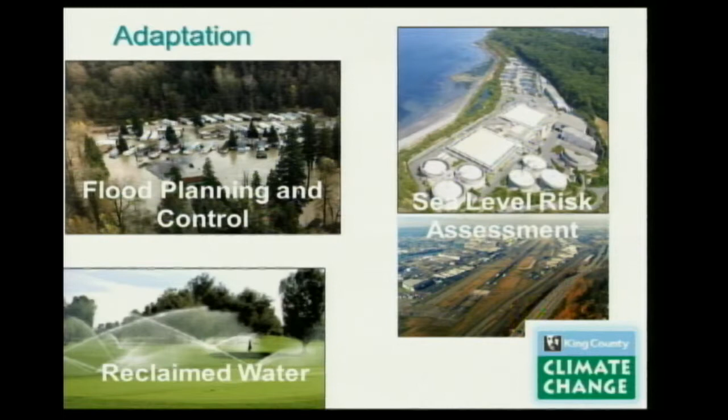So what are we doing for adaptive planning? We haven't changed this slide in a long time, but basically what we were directed to do is plan backwards, figure out when the impacts would happen and what we could do to address those impacts, as we did a lot of our programmatic planning in wastewater, which was undergoing a large 50-year planning event, updating that plan in 2007, and constantly asking the climate question of everything we do and the services we provide.

And I like this quote from Executive Sims back in 2006, because this is a climate science conference. I figured I'd let you see a politician say, go listen to the scientists, not the politicians, unless the politicians give you good policies to follow, and you can use those policies to do your work. The top policy is directly from the executive, basically saying we will be a leader in climate mitigation and adaptation, and we will consider any climate change impacts in our programs, projects, and policies.

The second quote up here comes exactly from the King County Council's ordinance back in 2010, and you'll notice the 2 dots there. I cut out the words that said by 2012, do all these things. Just thought I'd cut that out because I didn't want to answer questions like, have you finished?

In 2007, in cooperation with the Climate Impacts Group and ICLEI, King County produced a probably lightly read book on how to adapt to climate change. That outlined what we took as our approach for publishing the first climate action plan in 2007 for King County, which was a nice, black and white, fairly simple plan, updated every 5 years. So in 2012 it was updated again, and we put color photographs in it. So that's the difference between 2007 and 2012. Not really, but we knew a lot more in 2012.

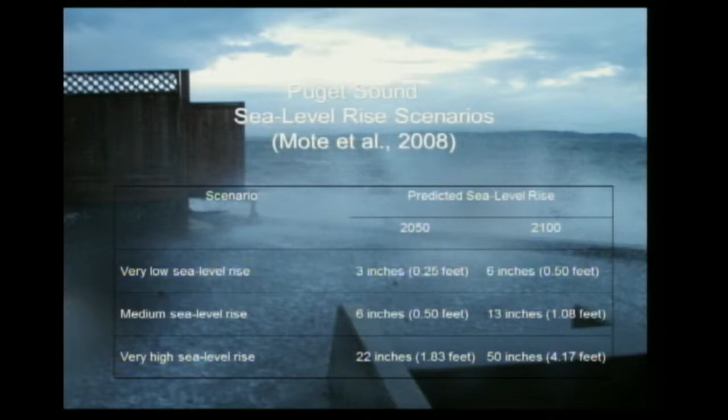But we also, once we started talking about sea level rise, we were informed about something called storm surge. Storm surge was also another effect. And if you look at the amount of storm surge as compared to sea level rise, you'll notice that storm surge currently, as it's recorded, is pretty large, 3.2 feet. That's pretty significant when we're talking about inches within a wastewater facility.

So both of these together, combine them up, and come up with a plan to say what will we do for capital projects. This particular table is in our documentation as guidance for our capital projects. So any capital project must consider climate change, must consider sea level rise as it does its planning process and in its design. And halfway through the show, I'll talk about how many different projects we've used this information on.

What we did is we put the information together, we converted it to our own special datum, which is metro datum. It's just back in the 50s when they started planning the system, they didn't want to use negative numbers, so they just added 100 feet to everything. So we have these really screwy numbers, say 112 feet, 108 feet, but that's what our engineers use, so that's what we presented it in.

And as you move to the right and to the bottom of this, your risk increases the more you can address those elevations in your facility. And I will talk about some of our facilities and how much risk we have associated with them. But that's how we took the science. We compacted it into a nice little table. An engineer can look at it, look at their drawings and say, oops, I'm below that, I need to do something about it, or I'm pretty safe, I'm well above that.

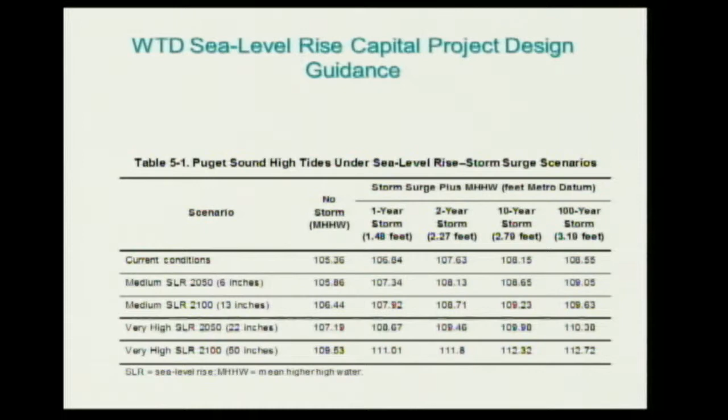So what is the King County Regional Wastewater System? Well, we're the big guys. We provide wastewater treatment for 34 local agencies. So everybody sends their sewage to us. We currently serve about 1.4 million people, but I think we're at 1.5 million people now. And then by 2030, according to Puget Sound Regional Council, we'll be serving about 2.4 million people.

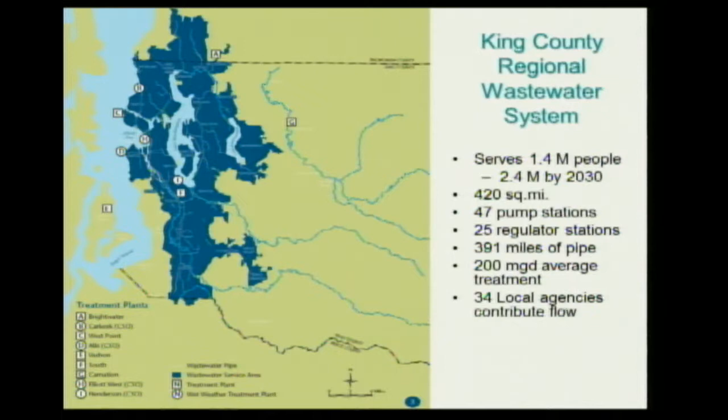We operate in Snohomish, King, and Pierce County, mostly the metropolitan area, as you would call it. We have 47 pump stations that we're responsible for, 25 regulator stations, which are small facilities that have gates and weirs that control the flow to bigger and smaller pipes. We have 391 miles of pipe. On average, we treat about 200 million gallons per day of sewage. And like I said earlier, 34 local jurisdictions depend on us for wastewater treatment and, of course, pay us for it, so they expect good service.

So we talked about on-site flooding. When we talked about on-site flooding, we wanted to look just generally at what facilities will fall underwater based on LIDAR information. That was a study we did in 2008. When we completed that, we came up with a nice table to show what facilities were vulnerable, but really looking at the surface elevation of the facility, what would be underwater.

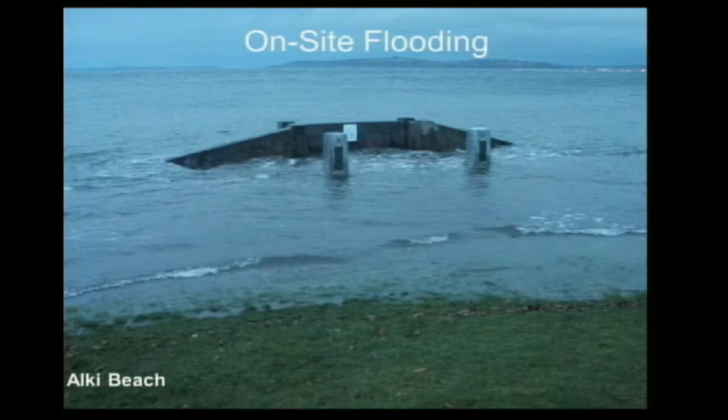I use this picture because this is Alki Beach on December 17th, 2012 during the King Tide event, and you can't see the seawall anymore. And a lot of our pump stations are on the other side of that seawall. This was a summary of our first study in 2008, and again, just always moving to the right and to the bottom, your level of risk goes up.

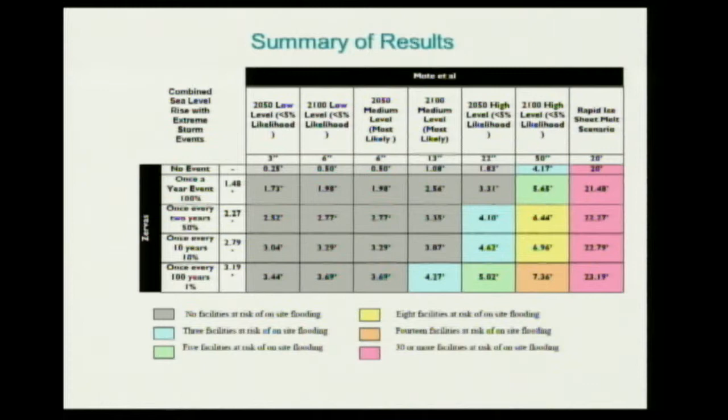One of the things we were asked once we presented this information to our management was, what's the worst case scenario? And we said, well, I don't know. And again, talking to the Climate Impacts Group, what's the worst case scenario? Very controversial at the time was rapid ice sheet melt, and they said you could see elevations in 20 feet. They didn't give us the 2 centuries part, but we thought 20 feet was good. So if we threw 20 feet into our analysis, we pretty much put all of our facilities underwater, so that was a good worst case scenario to use.

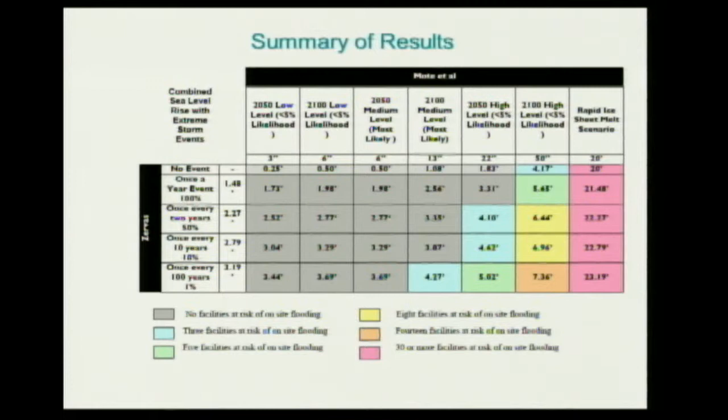But in general, with storm surge and with sea level rise moving across the 2050, 2100 scenario, you can see the number of facilities. The yellow is 8. The more pastel the color, the fewer facilities are being impacted by sea level rise. Now this is just surface flooding. At the same time, we started looking at the amount of salt water we had in our sewage system.

So during our King Tide events and during the course of the year, we had Daryl, pictured there on the left, out there actually measuring conductivity within the wastewater stream. Wastewater by itself has no conductivity, it should be 0. So what he did is he went out with these small meters, he'd measure conductivity, and he'd get a sense of how much salt water we were actually transporting to West Point, especially during the King Tide events when we expected the most inflow of salt water.

I've got some pictures to prove it. He'd open a manhole, take a sample, stick his meter in there, and a lot of times that water was actually clear. And sorry, it's after lunch, but sewage is not clear, it's brown or gray in color. So when he'd see clear water, he was pretty much measuring salt water in our pipes.

Salt water and concrete and metal do not mix. It increases the amount of corrosion, and we've estimated our cost for fixing corrosion ahead of schedule, in other words, life cycles less than 50 years, is somewhere between $4.1 and $7.9 million. And these are pipes and equipment at the West Point treatment plant and out in our conveyance facilities, gates and other structures that are made of metal. Concrete also corrodes under high corrosion conditions, and that's also fairly spendy to fix. And a lot of these pipes are big. Our biggest pipe is 14 feet.

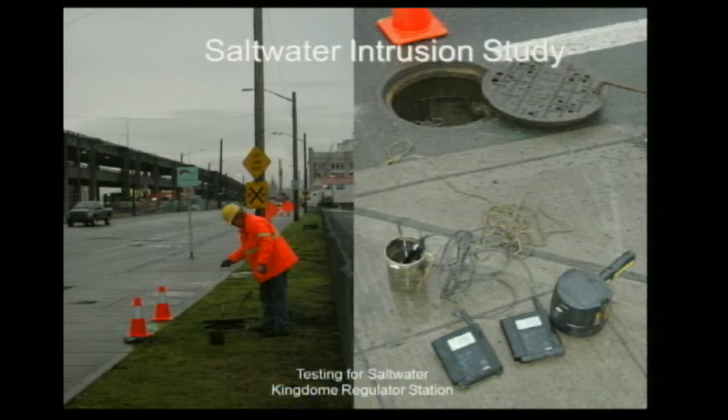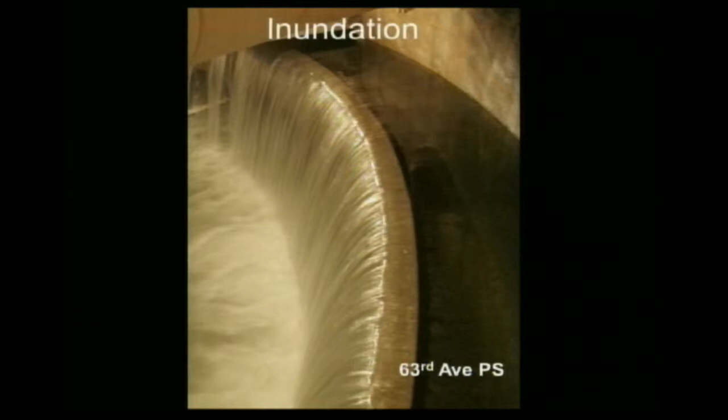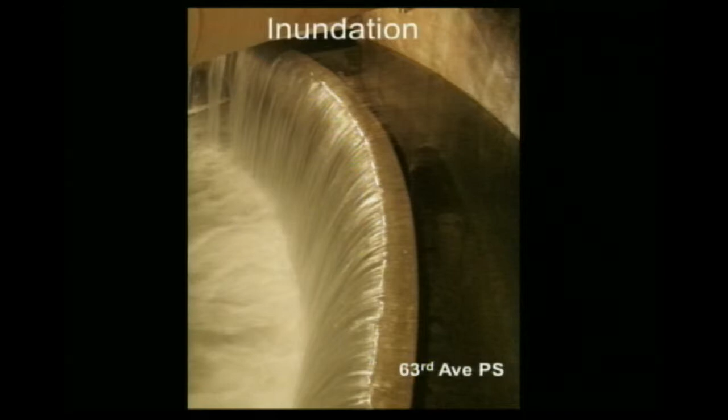This is a little bit better image of what we're talking about. Normally, there is no water going over that kind of wall you see there. That is clean water coming in from Puget Sound, going into our wet well and being pumped to our treatment plant. That was another king tide event. This was a pump station out in West Seattle. Some of the pictures I showed earlier of West Seattle were taken on the same day when the waves were crashing over the seawall. And a few houses actually got flooded along the way too.

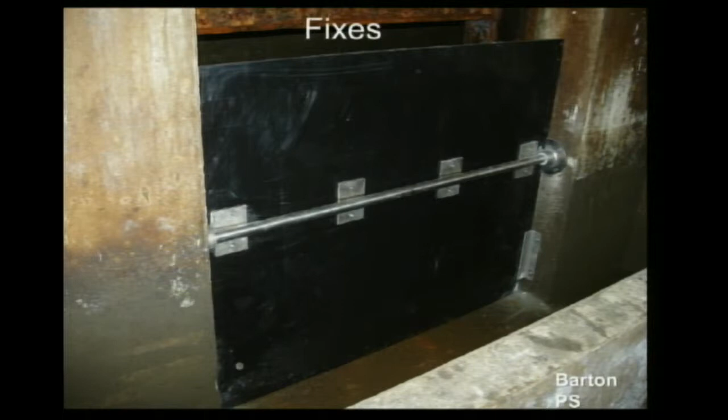So the major concern was we're pumping a lot of seawater. Our vulnerable facilities assessment for flooding didn't show us this many facilities being impacted. So we started looking at fixing the ones we knew about. This is the fix. This is about $20,000, what we call a flap gate. Basically, it's a spring-loaded gate. Water can push it open to go out. If the tide comes up against it, it stays shut. Took about 2 days to install. But we had understood that surface flooding was the only issue we were going to be dealing with.

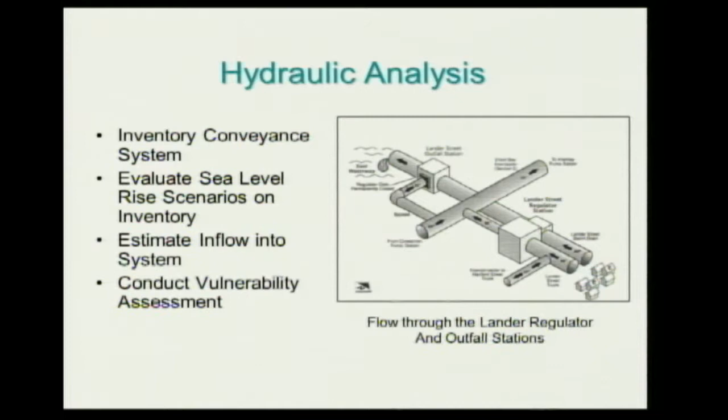The hydraulic system, as you can see in this image here, is fairly complicated. There's pipes, there's pumps, there's gates, and there's weirs to deal with. And all of those had elevations associated with them. Going back to our little table with all those elevations, these are the things the engineers needed to consider. So we started evaluating and inventorying all the elevations within all those 47 pump stations and 25 regulator stations, asking where are the elevations of these, and are there any backflow preventers, flap gates, tide gates to protect it from sea level rise? And we basically did an assessment.

The Barton pump station down near the Fauntleroy Ferry dock, that was the picture of the flap gate that I showed you earlier. And then the Murray pump station down by Lowman Beach, if you live in that neighborhood, you know we're doing a giant construction project. That facility will be addressed. The nice picture I showed you of all the water coming into the facility, that's the 63rd Avenue, which is also in West Seattle. That's being addressed with a new flap gate, although that one's fairly complicated as we have to go out into the tidal zone to actually get to the point where we want to put the flap gate.

So the other thing, I talked about the big treatment plant. West Point is the largest treatment plant in the state of Washington. It serves about 700,000 people. It's not a cheap facility. It probably has about $1 billion investment in it, so we thought, well, why not check it out for sea level rise? But the first thing we did is we talked to our operating staff about sea level rise, and

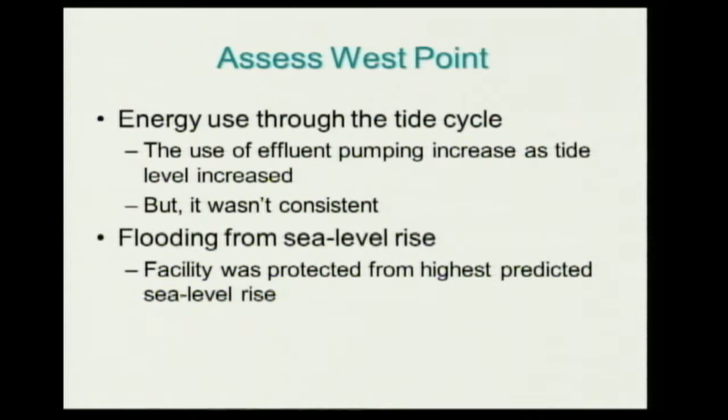But the facility from flooding, again, using LiDAR data, but also grabbing the survey data. I maintain about $10,000 a year to send surveyors out just to kind of do elevations for us. And we went ahead and looked at West Point. The facility, if you've been to Discovery Park and hiked along the beach, is behind a fairly large bermed wall. The shortest wall is at about, I'm sorry to use metro elevations, that's what we're used to, about 110 feet in our metro elevation, so take 96 feet off of that, and that gives you what the NAVD88 elevation is. So we felt like the facility was pretty well protected.

We talked to our operators about times during king tides, and what they pointed out was, well, yeah, the trails flood, but nothing really comes into the treatment plant. So this answered the question because I have people from the city of Seattle here. They did a really great press conference back in 2012 or something like that, and immediately said, our wastewater treatment plants are going to be underwater. And we went, oh boy, that's news to us. So we got good motivation to go out and do this quick study to find out if West Point Treatment Plant would be underwater. And while it was not done on purpose, the facility being armored the way it was protected it from sea level rise.

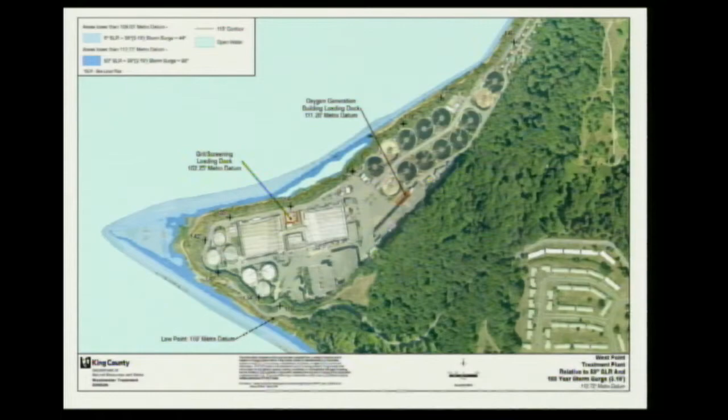And I'm not going to say that anybody was thinking about that in the 80s when they upgraded the treatment plant. It was done for more of an aesthetic purpose, that's landscaping, so people wouldn't see the treatment plant when they walked on the beach. But, you know, served a dual purpose. We just completed a vulnerability from actual flooding, so we were actually asked to look at flooding from creeks, rivers, and lakes. This was done in GIS, and there's a poster going to be presented on that this afternoon in Meany Hall. We identified key structures that were within floodplains.

Floodplains are fairly nefarious data. Everybody has their own version of it, and not all of it's 100% correct. But we used that data. We looked at the floodplains and looked where our facilities were within that floodplain. If a facility was in a floodplain, we considered it vulnerable. We had 6 facilities out of the 6,000 that poor Crystal looked at.

Is Crystal in the room? There she is. Yeah, we had her working for a year or so. Looking at every single, I was including manholes, all that stuff. We said, yes, Crystal, you have to look at that.

So we came up with actually 6 facilities that were major facilities, pump stations, treatment plants. And we're going to spend the next couple of years actually going in and doing the more detailed analysis with survey data.

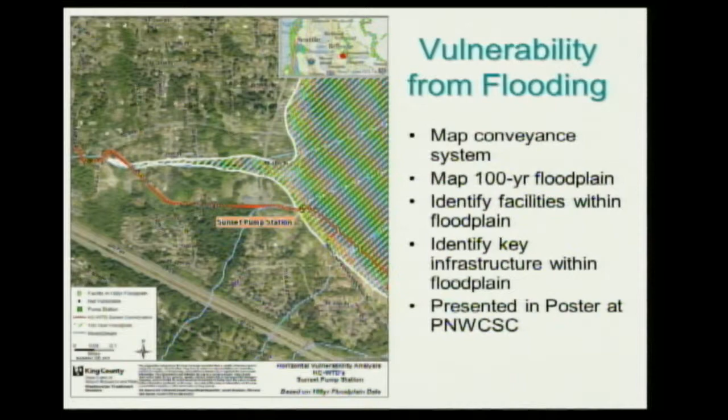On a long-term look, temperature, as we heard about this morning from Amy Snover, we'll keep looking at it. We did look at sewage temperature on a very hot day in 2009 that reached 103 degrees, and the sewage temperature wasn't the warmest it was that year. It was actually warmer another day, and we found out that Red Hook Brewery discharged some pretty warm water to us that day. So finding out what really influences temperature of sewage was kind of interesting.

Precipitation, same thing. Our hydraulic modeling is not as accurate as the climate models, so the factor of safety we put into the design of our facilities is greater from that uncertainty than the uncertainty around precipitation. I just had to explain that to the Regional Water Quality Committee last week. They didn't quite buy it, and we were accused of not believing in climate change. And we do. We believe in climate change. But we're not putting precipitation as a major contributor to the size of our facilities.

What we do think is more cost-effective is actually have a project of adaptive management where we reduce inflow and infiltration from local utilities and stormwater from local utilities. In that way, reserving the capacity for future population growth. Much cheaper.

Can't leave this presentation without acknowledging the work of a lot of people that have helped me over the years do this work. Sean O'Neill and Crystal Murphy have been doing the majority of the work, and they're both GIS analysts, using Esri ArcView to do this.